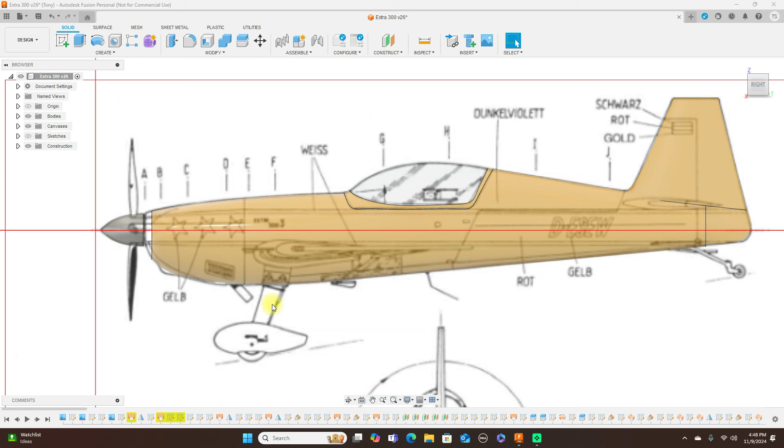Let's go ahead and get started. I showed you guys how to do the spinner and all this stuff in the other video. Let's go ahead and make this landing gear here, I'll show you how to do that.

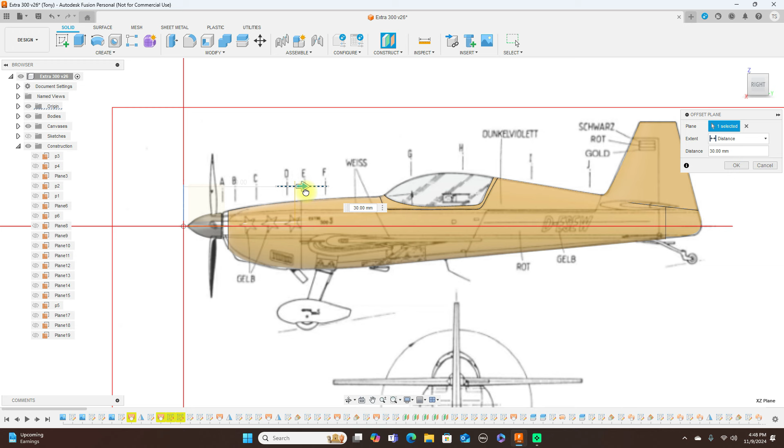I'm going to put a profile about here - a construction plane, excuse me. Construct, offset plane, and use this, and put it about right there. Click OK.

Turn the origin back off. Then I'm going to create a sketch on that plane. Click that plane and create sketch.

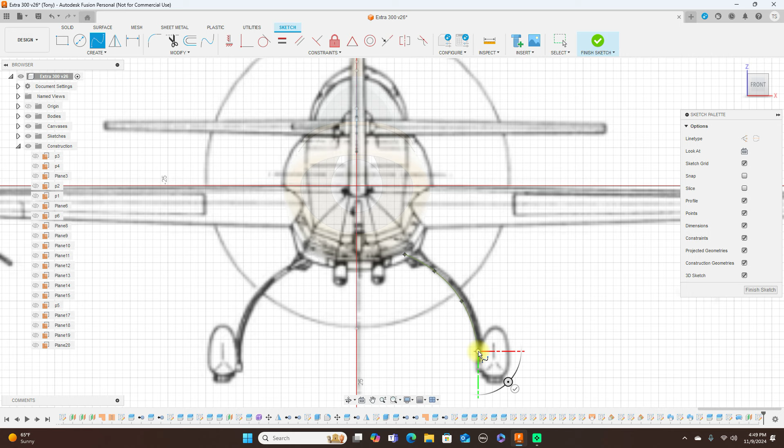Next, I'm going to use a fit point spline. Again, I'm just using more points than are needed. You can actually do this shape here with just 2 points, but I'm doing this for speed. Okay, that's a pretty good shape there.

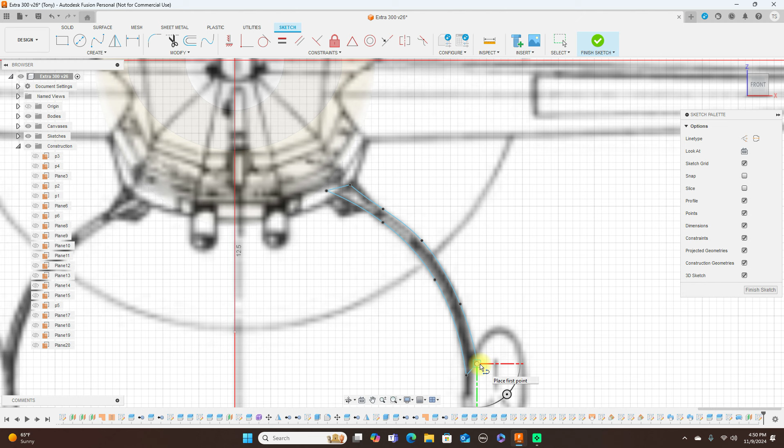Then a line, close that up, and we have this profile here. Finish sketch. Turn the sketches back on.

Now what I want to do is extrude this - E for extrude, and it's selected already. Pull this back, click OK. We can turn this body off here.

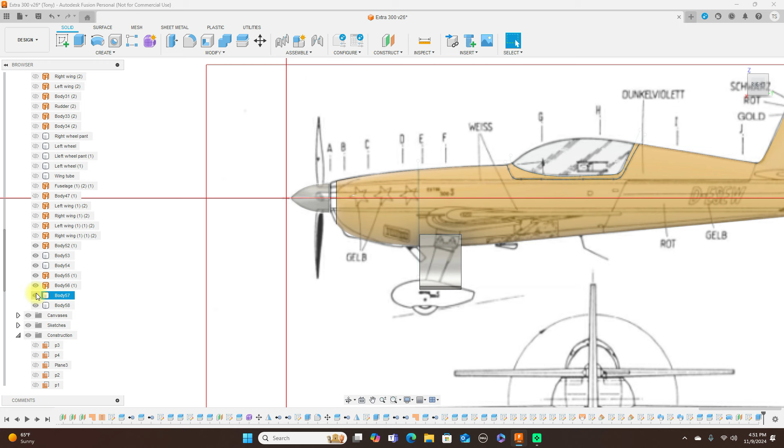Now create a sketch on this plane here. Use a line, or you could use a spline, whatever one you want to use, to get this. Finish sketch.

Now we're going to split body. This is the body split, and the splitting tools are going to be this, click OK. I'll come over here, and this piece here we can just remove it, and this piece here we can remove also.

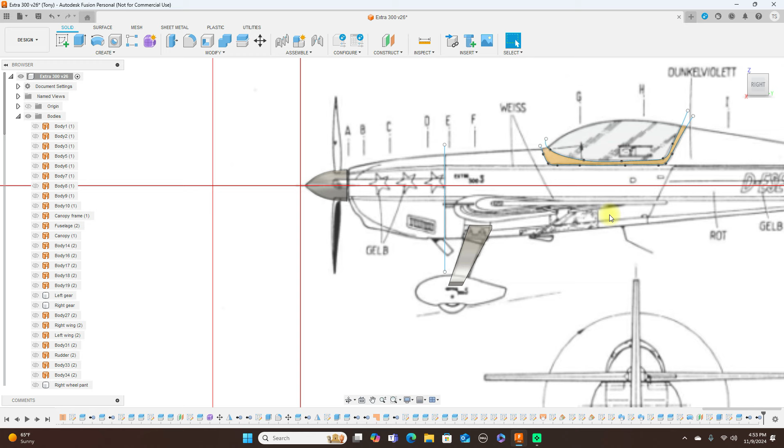And that line you can cut here too to make this better. And that's our gear.

Then what we can do here is go to mirror, select the plane, that plane there, click OK. And here's your 300 so far.

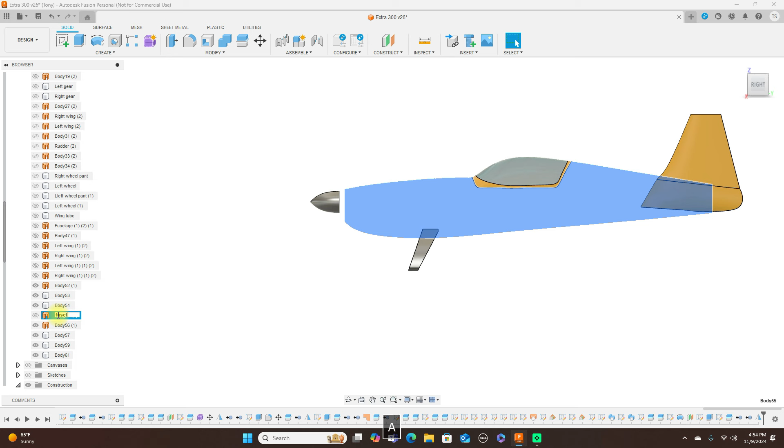Just change this to fuselage. Turn these canvases back on, and turn this off to left gear. And right gear.

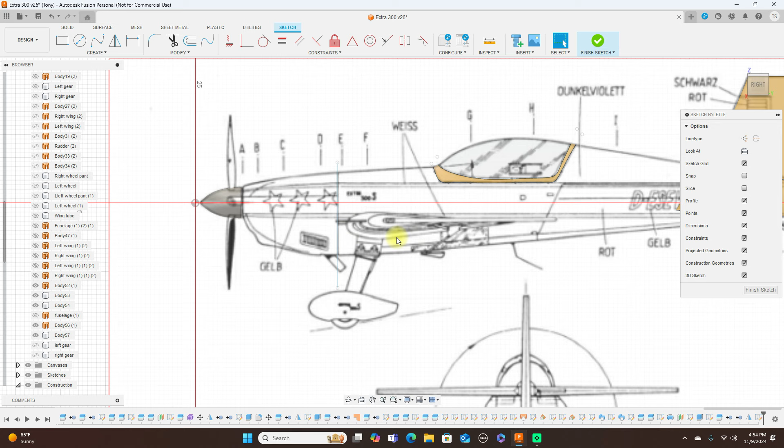We're going to do the wing next. Create sketch on this plane here. Again, if you have a wing profile you want to use, then go ahead and use it. Again, I'm just going to do an arbitrary one here.

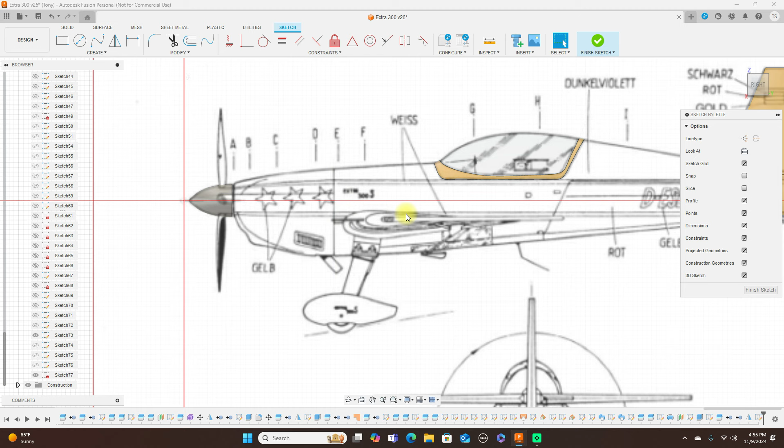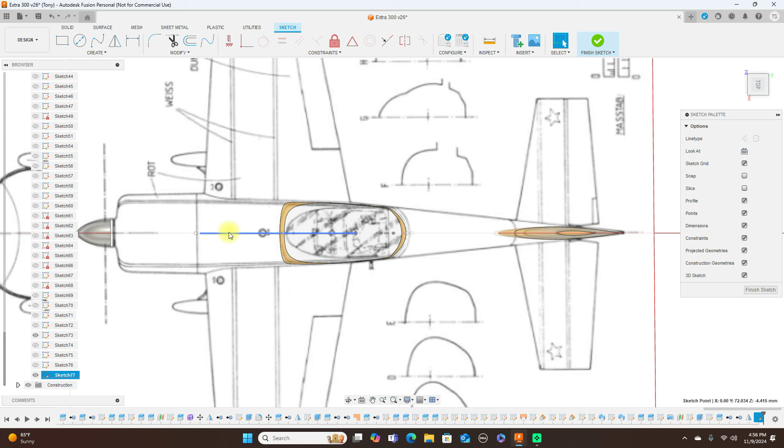And look at this from the top. I don't know what happened to that line, but we'll do it again. Okay, and imagine this coming up here, it does - in the back of it, same thing, so the back line. Okay, that's fine.

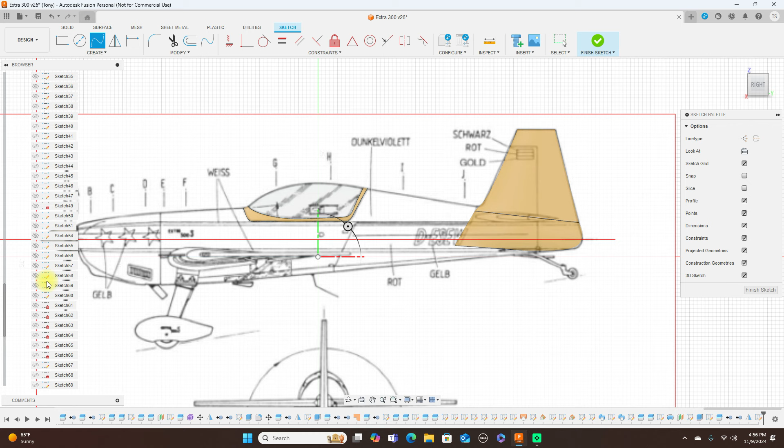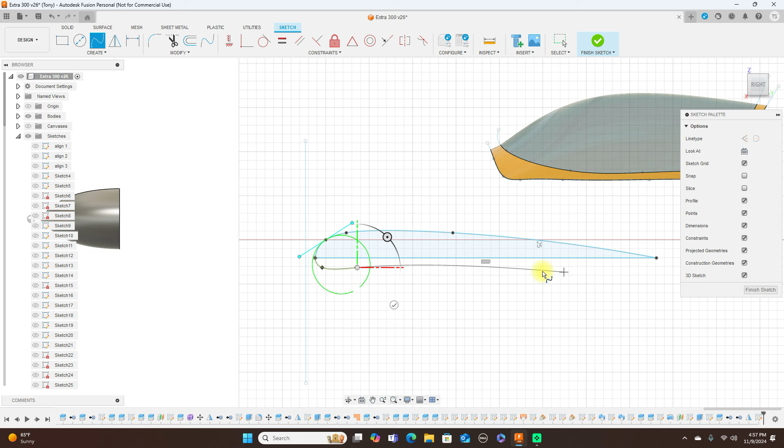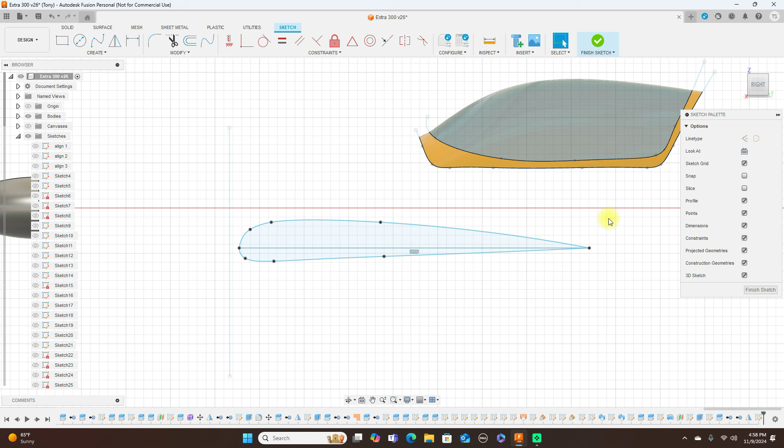And this is just an arbitrary airfoil again. Okay, and finish sketch. Turn the sketches back on.

We're going to do an offset plane - come up to construct, offset plane. Excuse me, not an offset plane, plane at angle, sorry about that.

Select this, that's the line. I want to turn that plane on. And it's at 0 degrees, keep it at 0.

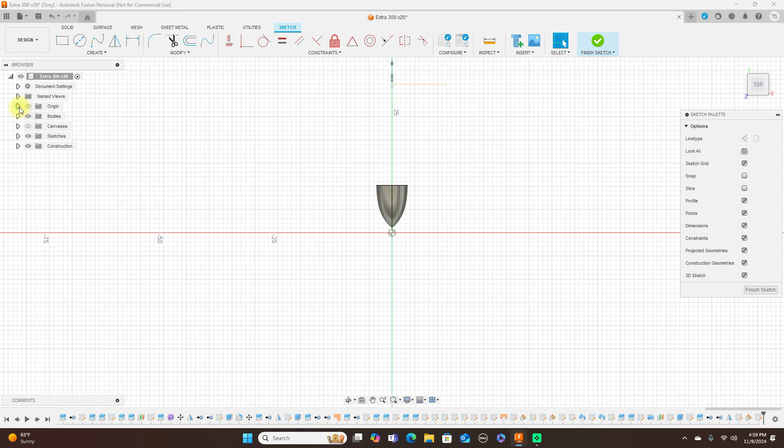And we're going to create a sketch on this plane here. Turn the canvases on. Select the line. Now, it's not letting me snap to that line, so use project.

This line here, and click OK. Now select the line tool.

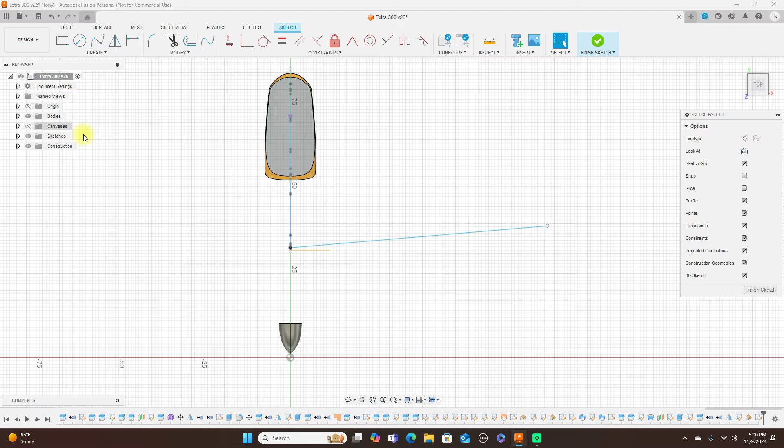And take a look at this, make sure I'm on the right part - and it is. There. Turn the canvases back on.

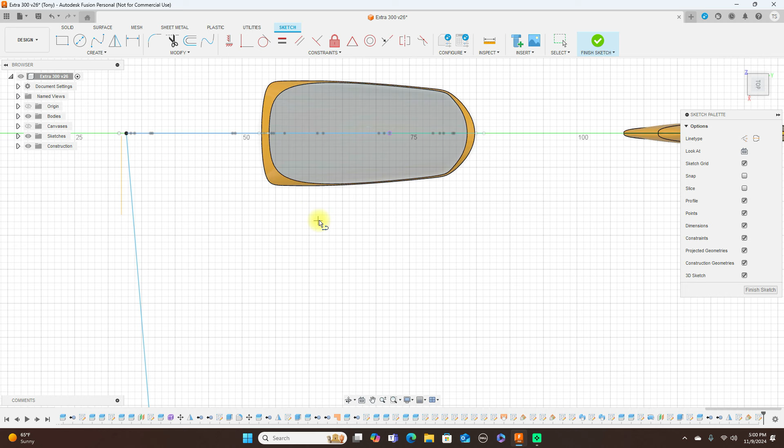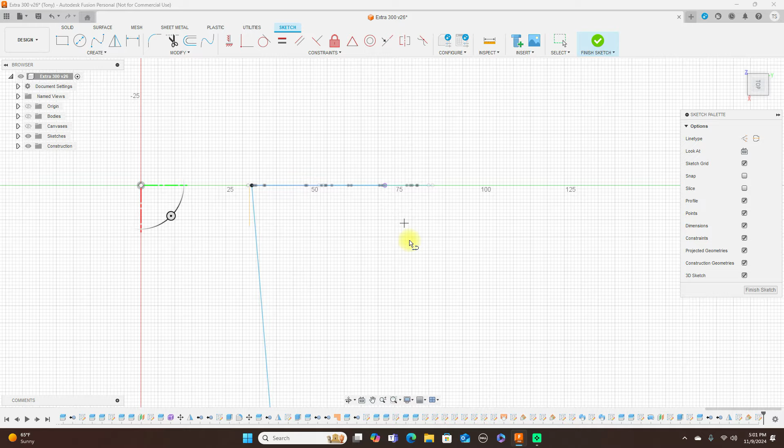And another line. Line again. Turn on the bodies - not the bodies, canvases. Finish sketch.

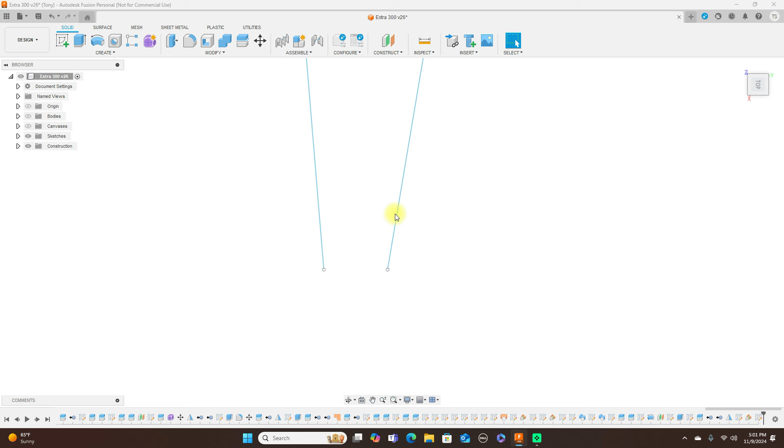And surface, create, and we're going to use the sweep. Change this to path guide rails, and this full extents. Then select the two profiles here. And that's the path, and this is the guide rail. Click OK.

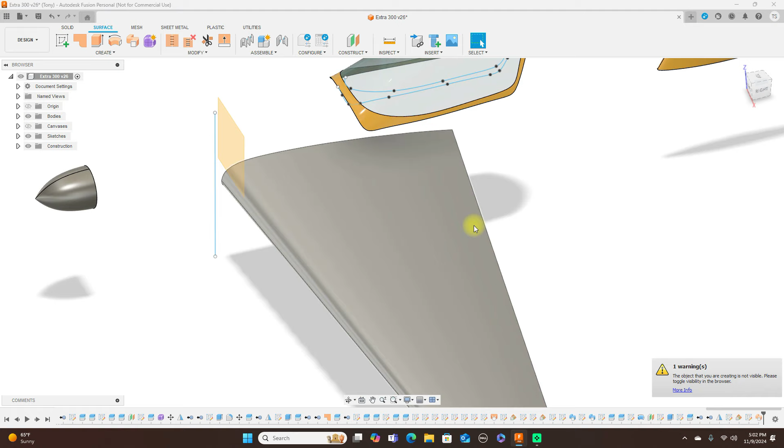And there's our wing. Change this to left wing.

Now, when you use the surface tool, the surface sweep, then this is hollow. So the next one over here, well, let me go ahead and just mirror this. If you used the solid and swept it using this, it would be solid. So I'll show you here.

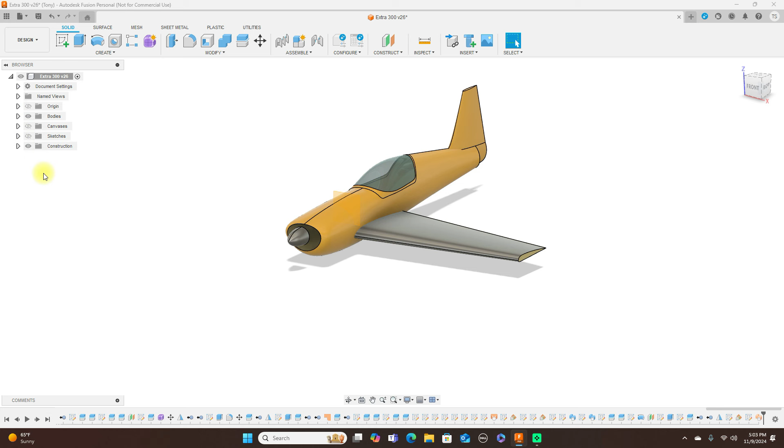So now we're in the solid mode, create, and I'll use sweep, change this to path and guide rail, full extents, select these two profiles, select path, and the guide rail.

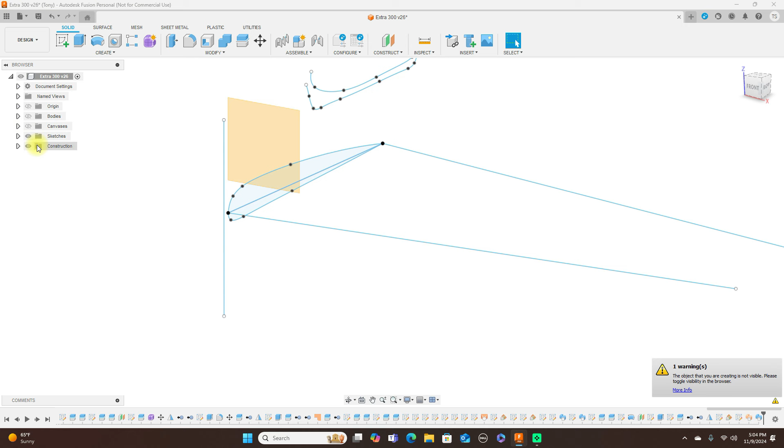Click OK. We'll scroll back up here, a lot of sketches, and turn the bodies back on.

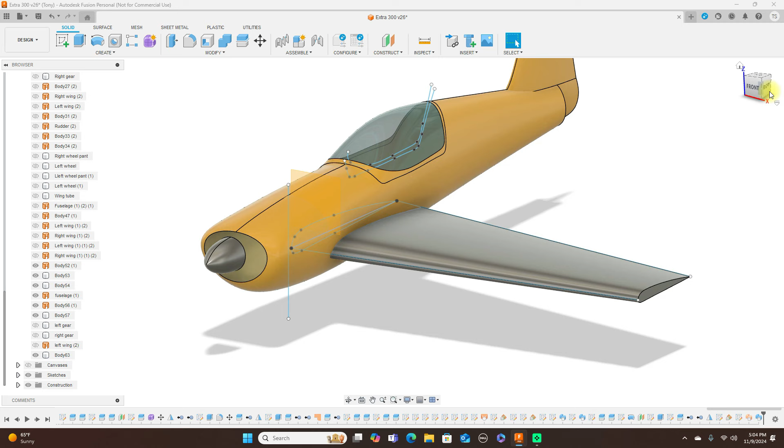Now this here is the wing that we use as solid. As you can see, this wing is solid. And this one here, this is surface.

You can see this little opening here, orange looking thing. As you can see, this wing is hollow. Let's turn the fuselage off here. You see it's hollow.

And this one is solid.

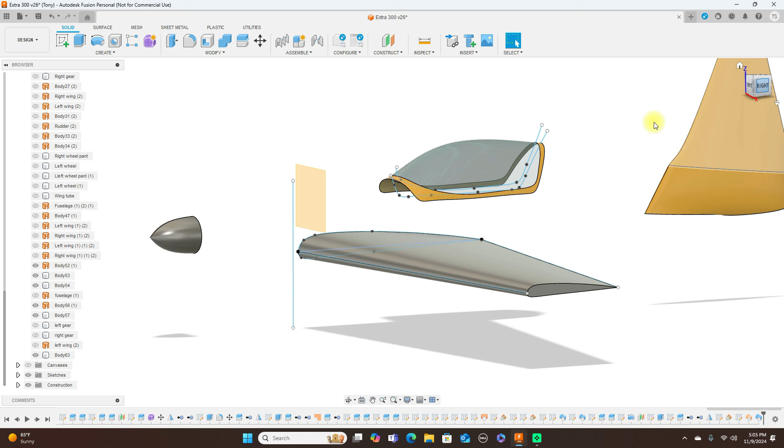Okay, we got that. And the stab in the back is done the same way.

So turn the canvases on, and turn the fuselage off, and turn—I'll just call this the rudder for now, even though the whole thing is not the rudder.

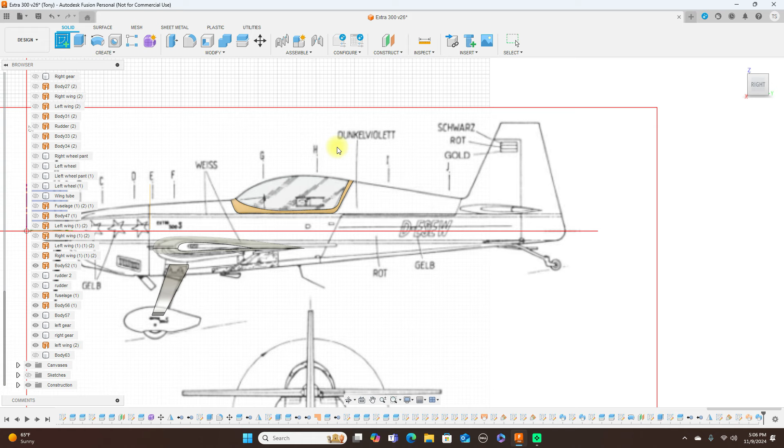Okay, we're going to do the same thing. We're going to create a sketch on this plane here. It's a line from here to here. And an arbitrary airfoil again, so this.

Going to mirror this, and this is the mirror line. Click OK, finish sketch. Turn the sketches back on.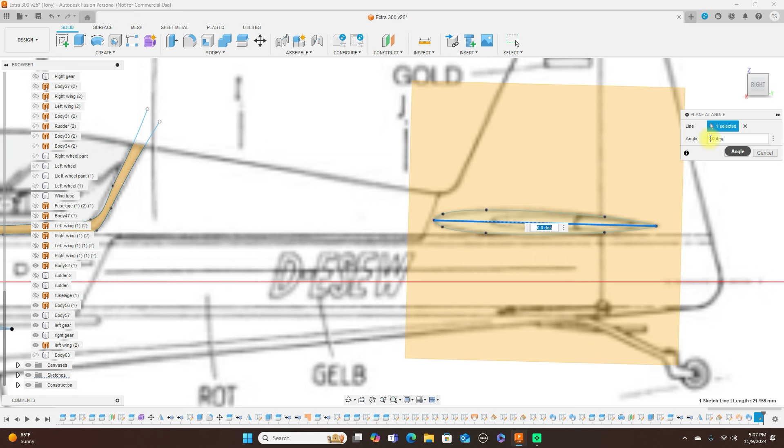Now we're going to use plane at an angle, so construct, plane at an angle, select this line here, and change this to 90 degrees, and click OK.

And now we're going to create a sketch on this plane here. So we click the plane, click Create Sketch.

Select the line tool, snap that there, and pull this all the way down. Same thing for the back one. Finish sketch.

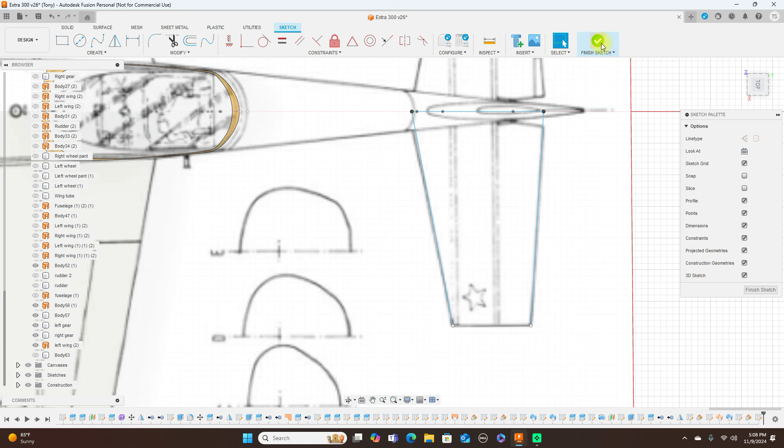Turn the canvases off and come up here. I'm just going to use a solid this time, and we're going to use a sweep.

Path, guide rails, and full extents. Select that profile and this profile. This is a path. And select the guide rail as this. And click OK.

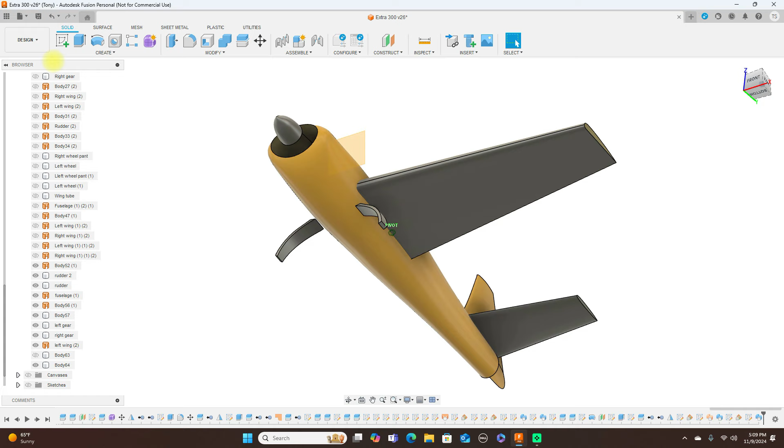And that's our airplane so far. Then we just come over here to mirror this, and select the mirror plane as this. You can join these, but I'm not going to—I'm going to leave these as new bodies. And click OK.

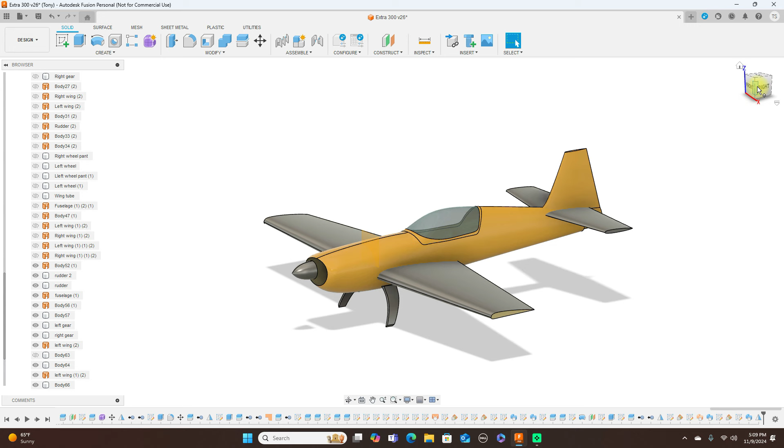And this is looking really good now. Turn the canvases back on.

Now this area right up here, in the beginning when I made this, the sketch that I used—let's see if I can get back to it.

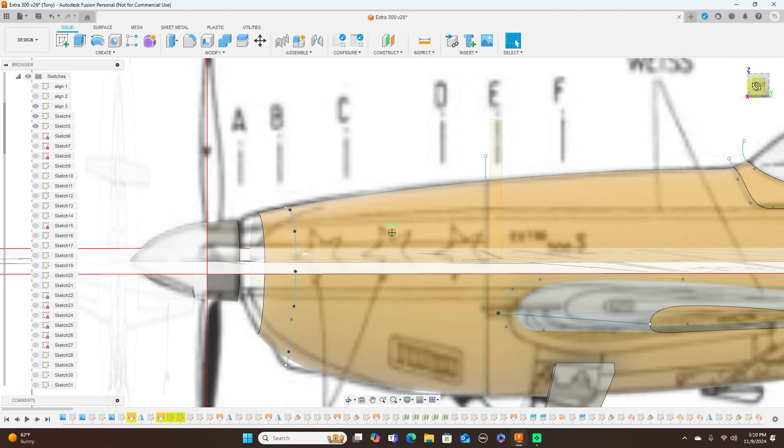Okay. This is what I used. That—turn the canvases off here.

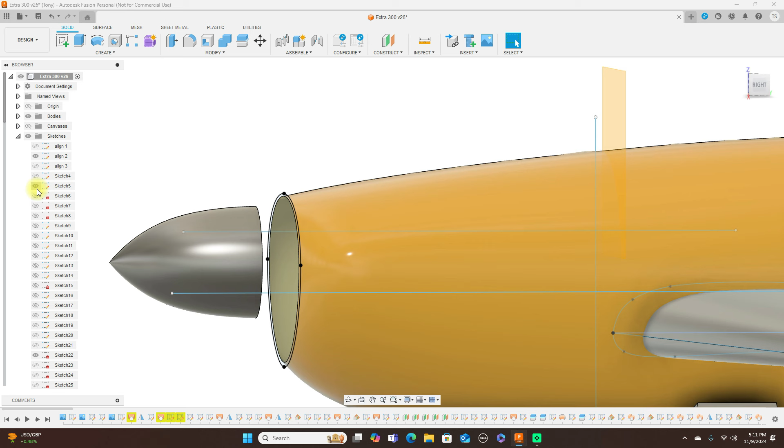Okay, now this sketch here, what you need to do is draw the sketch out farther. Just extend these out further. And then put your plane here like we did with the other ones back here. Use the project include, then select intersect, and start it sooner than what I did. And that'll just pull that up forward like it should be.

And the wheel pants, to make those, let's see.

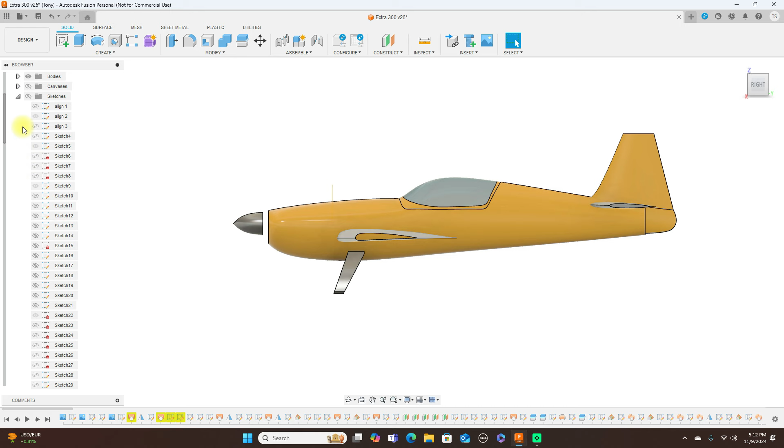Turn the gear off. Okay, we're going to do the same thing as we did to make the fuselage here, you just, well...

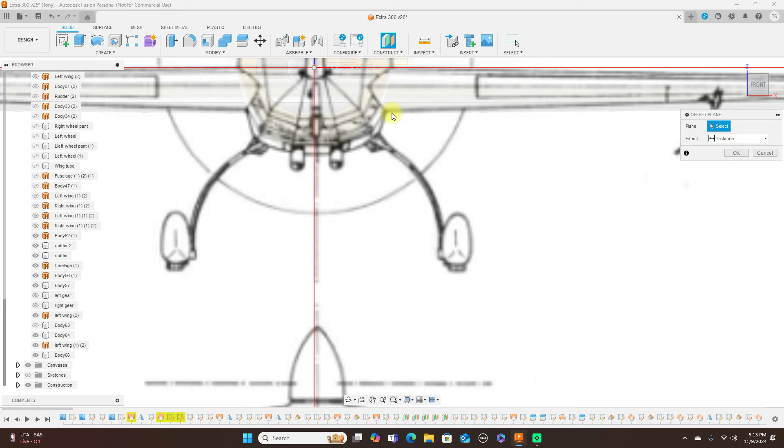Where the wheel pant is, we're going to come up here to construct and use an offset plane, and we're going to pull this over. And so this is about in the center, straight up here. And then click OK.

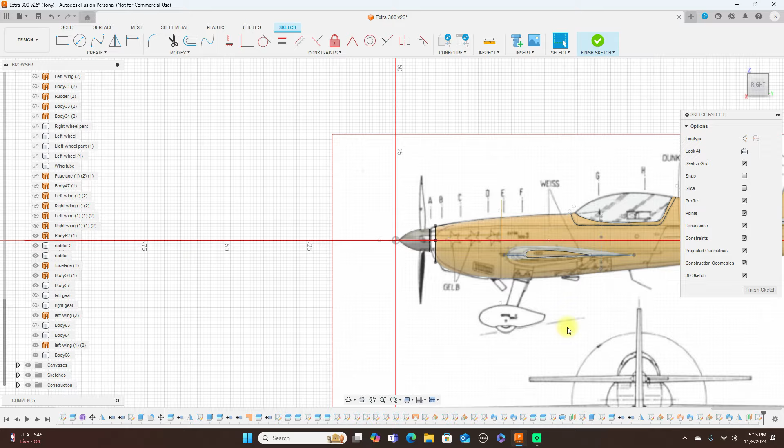Then we're going to create a sketch here on this plane here, and use a fit point spline.

I'm showing you guys how to surface model this wheel pant. Now, if I wasn't doing it this way, I would just use this, a solid form for this.

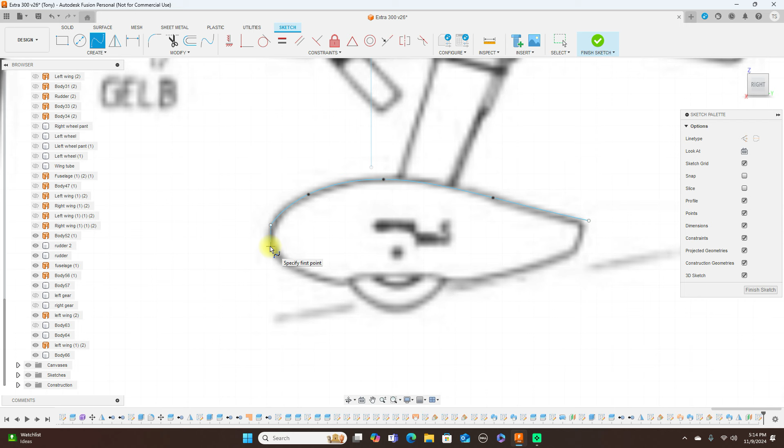And again, don't use all these points like I am here. Use less as possible. With this shape here, you should be able to, again, just use 2 points. But I'm just using more, just for speed.

Finish sketch. Turn the sketches back on. And turn that last plane back on then.

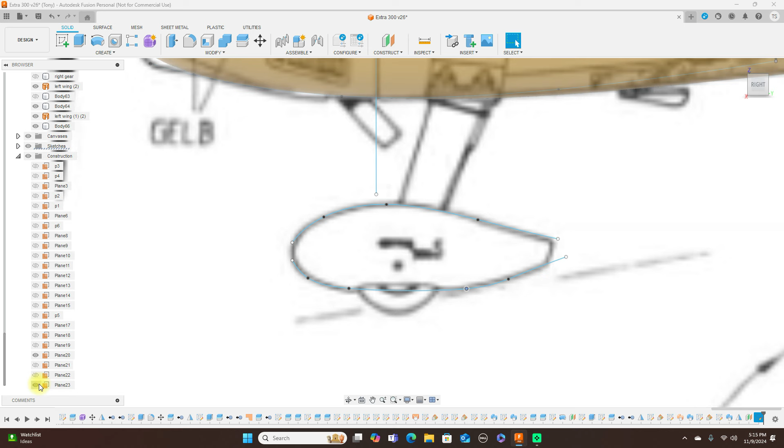And we're going to create a sketch on that same plane again. And we're going to sketch a line. Doesn't have to be long or anything, but we want it in the center here. Just the center between here, I'm sorry, the center between top and bottom. Then finish sketch. And now we're going to do plane at an angle. So construct plane at an angle. Use this line here, and click OK.

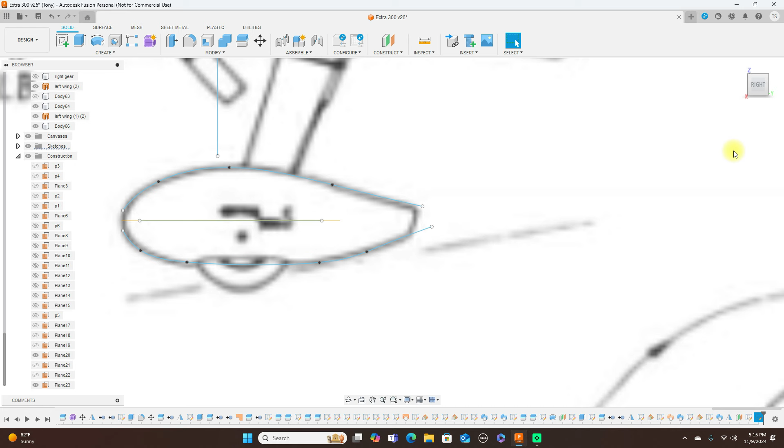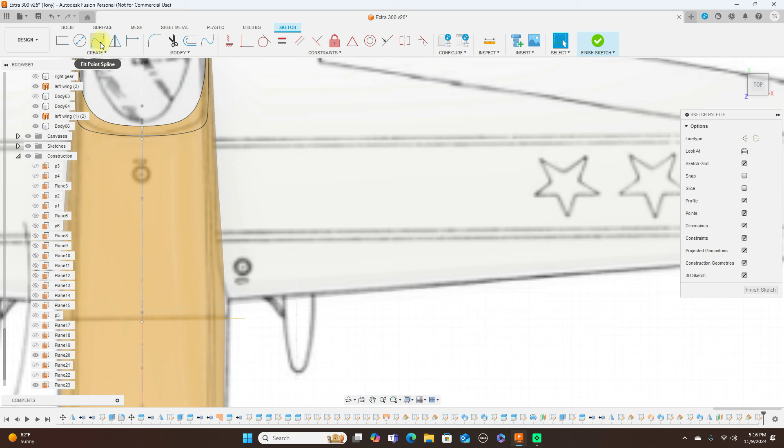I want to create a sketch on this plane here. And we want to project this line here. And click OK. And sort of follow the shape here.

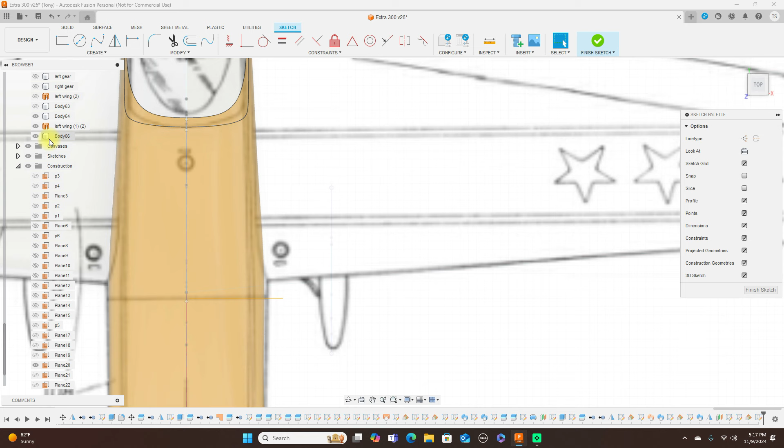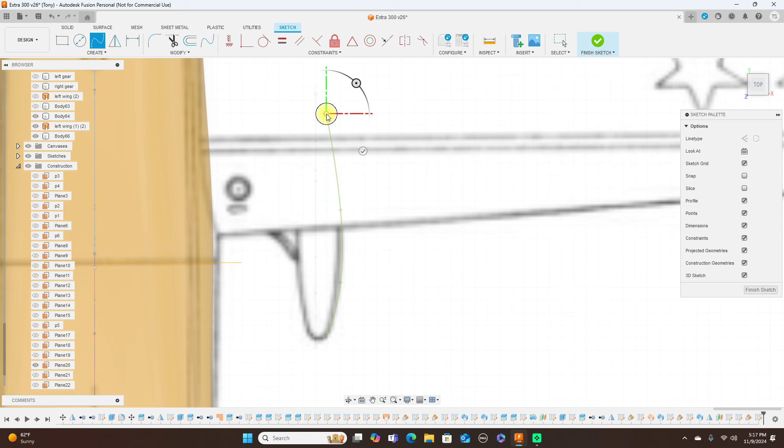And we cancel this, and do that again. I didn't want it to connect to that, so fit point spline. And I want to mirror this. And the mirror line is this. And finish sketch.

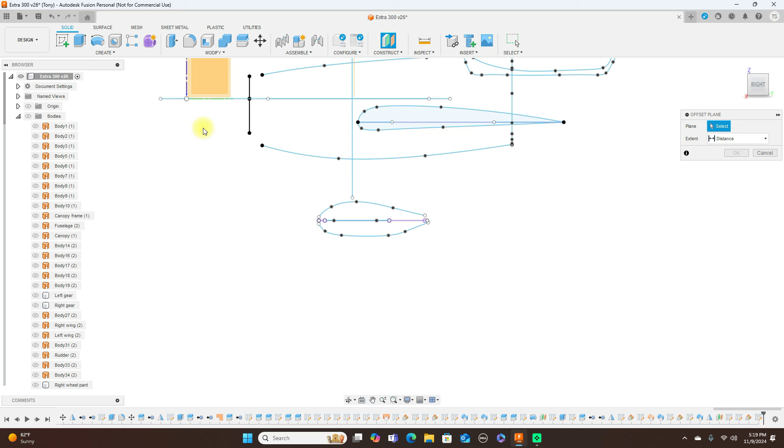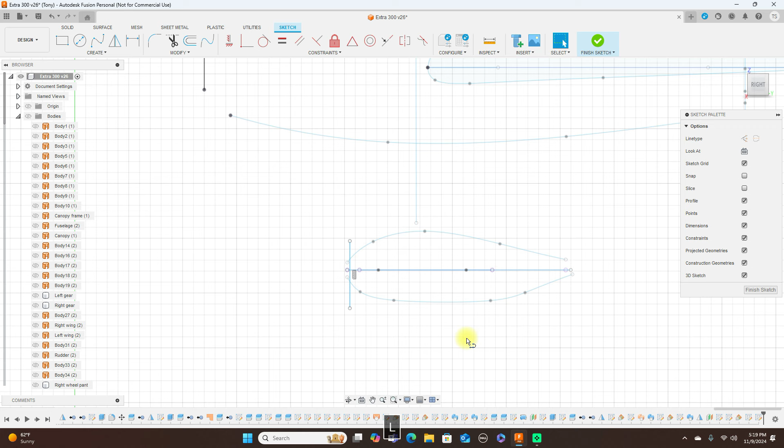Okay. Then we're going to put some offset planes in here. Cancel this. What I'm going to do is create a sketch on this plane here and do it this way. Just do a line here. Another line here in the center of this. And another line from here.

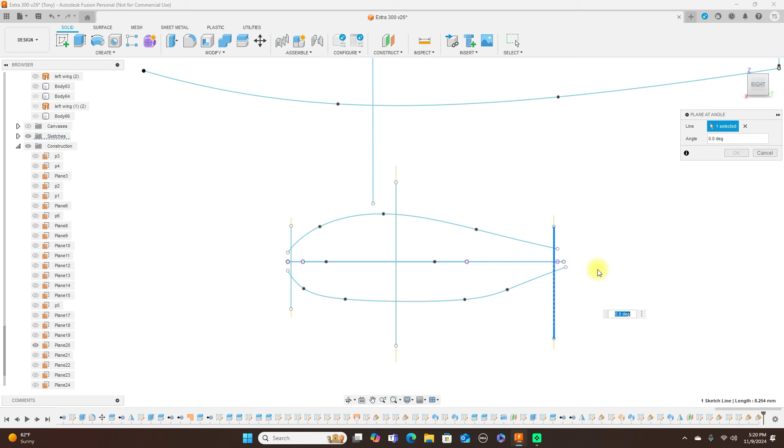Finish sketch and then construct offset plane. Excuse me, not offset plane, plane at angle. And click OK. Same thing, construct plane at angle here. And construct plane at angle here. Now you can do these one by one if you want to, and do the sketch on the plane one by one. Create a sketch on this plane.

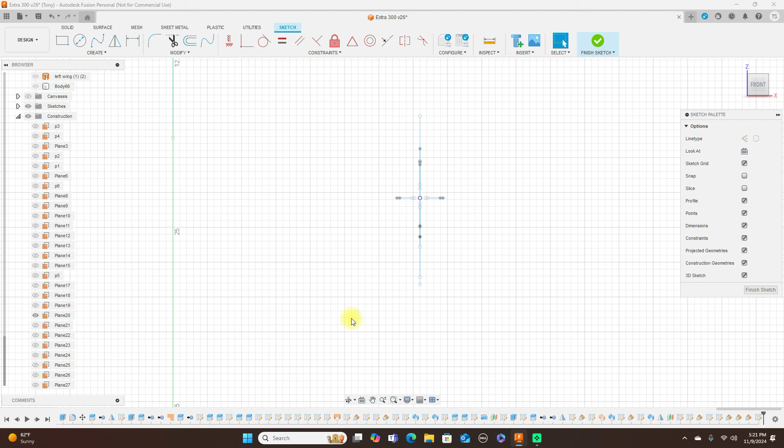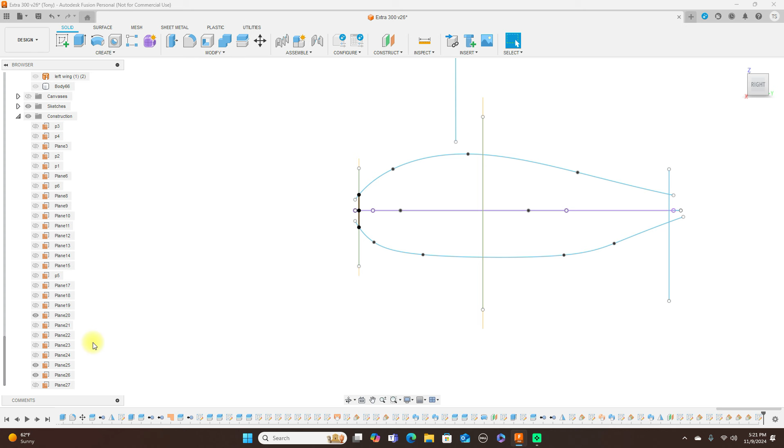And come up here to create, project, include, intersect, and these 4 lines here. And fit point spline. Finish sketch. And create a sketch on this plane. Do the same thing with the project, include, intersect. Fit point spline.

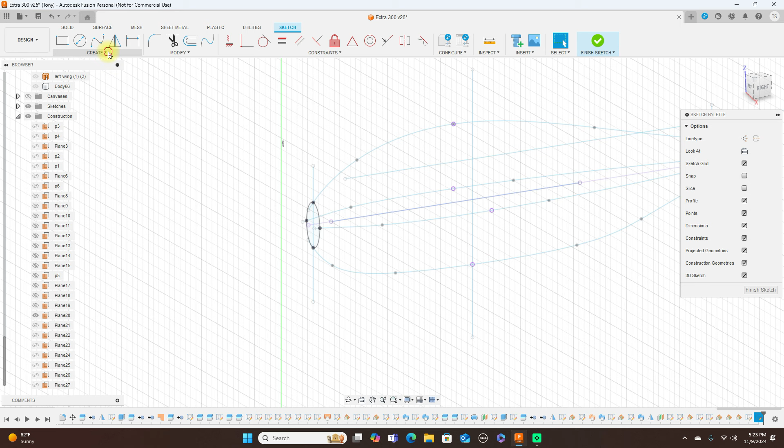Okay, that. Delete this. Now what happened, that point didn't get up here with the intersect with that. So I will do this again. And do this. Click OK. There it is. Fit point spline.

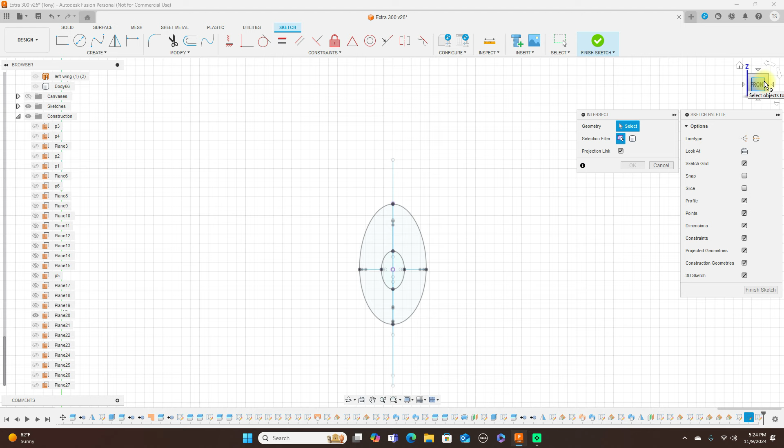And the last one here. Create a sketch on this plane. Project, include, intersect. Select the 4 lines again. And finish sketch. And we're going to do a loft here.

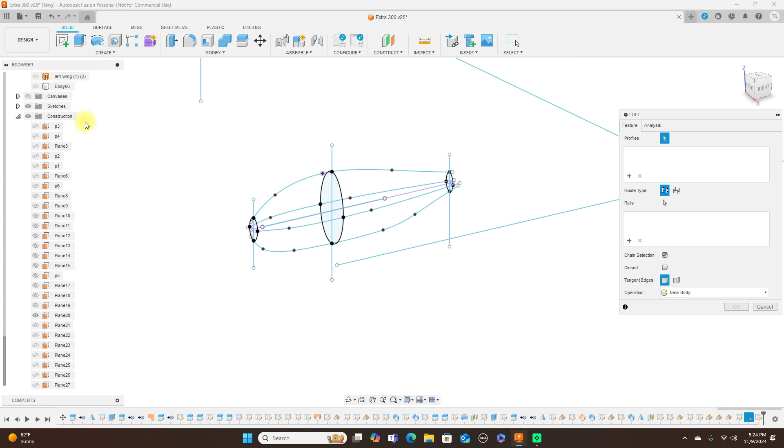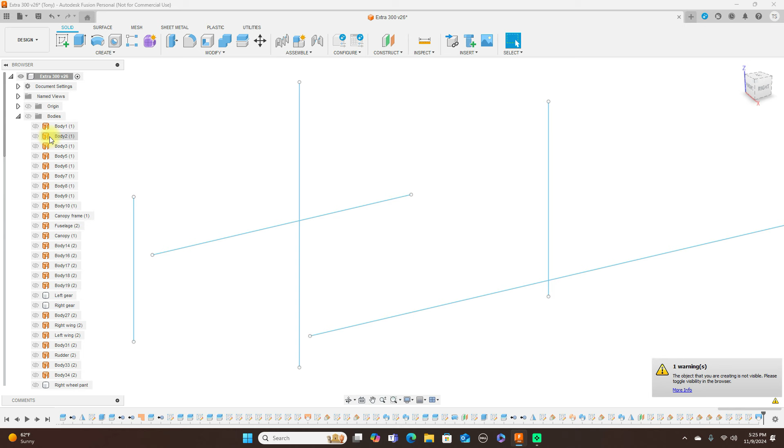Now, turn the bodies back on. And this is our plane so far. Okay. Turn some of these sketches off.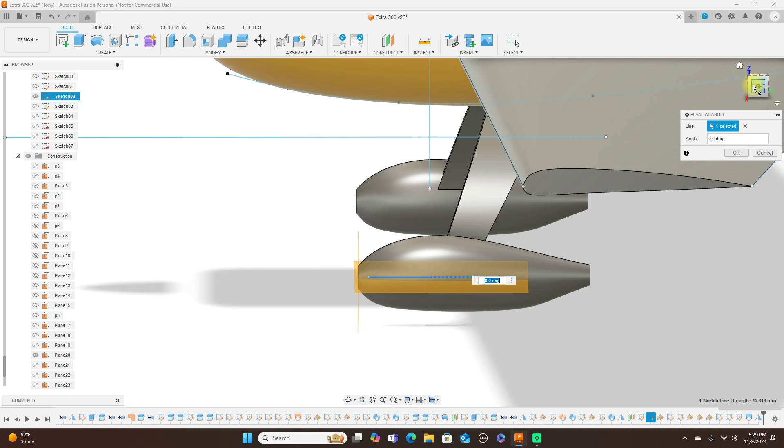And I want to put an offset plane. I don't know why it keeps going to offset plane. It's plane at an angle. This line here. And change this to 90 degrees. Click OK. Now we're going to create a sketch on this plane here.

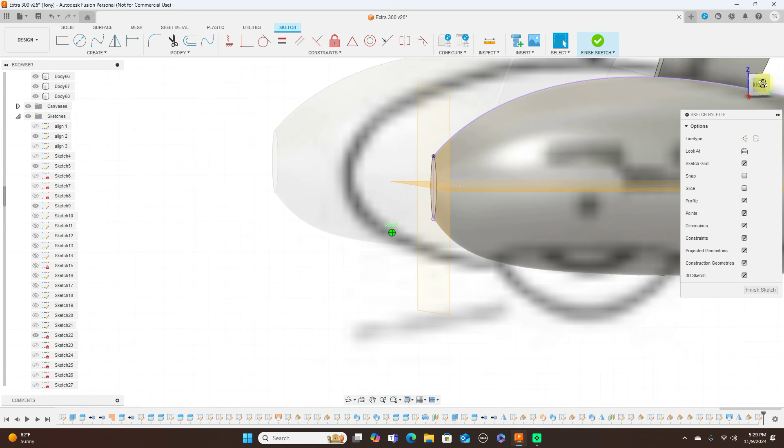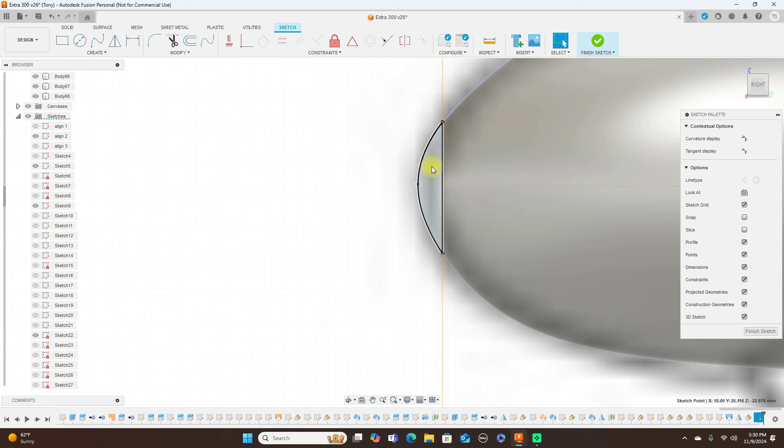And turn on sketches. Or excuse me, the canvas. Project this. And use a fit point spline. And click OK.

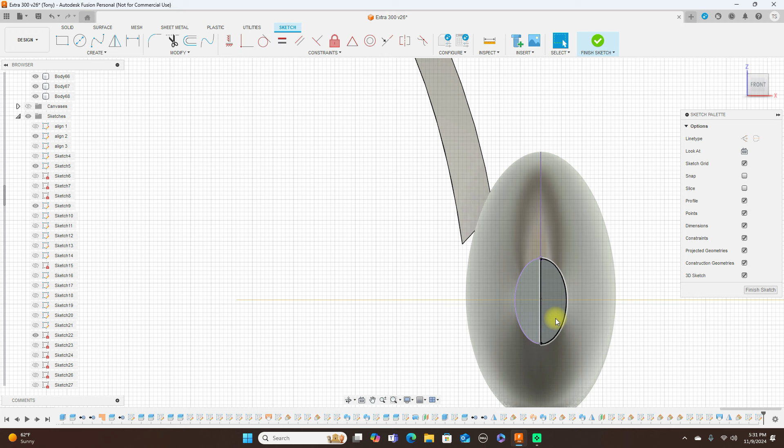Now we want to create a sketch on this plane here. And project this. Click OK. Line. And we have our two hemispheres. And finish sketch. Create. I'm going to loft this profile, this to this. Click OK.

And you're going to do the same thing for the back here. The exact same thing I did here. Since the planes are here now, you don't have to put the plane at an angle here. It's already there.

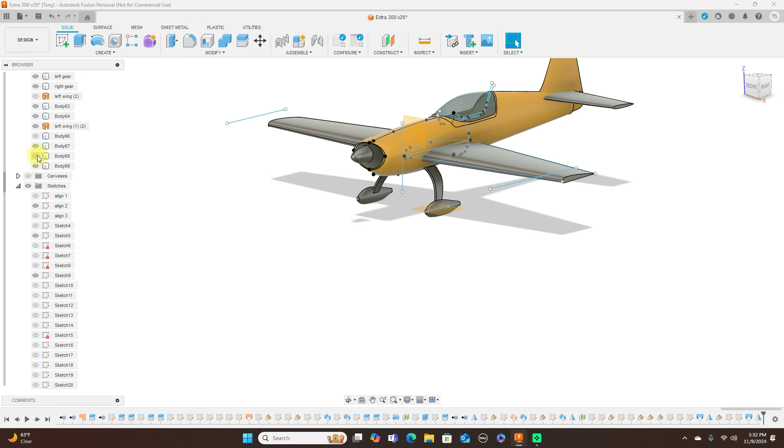Turn the sketches off. Okay, that pretty much does it for this particular model.